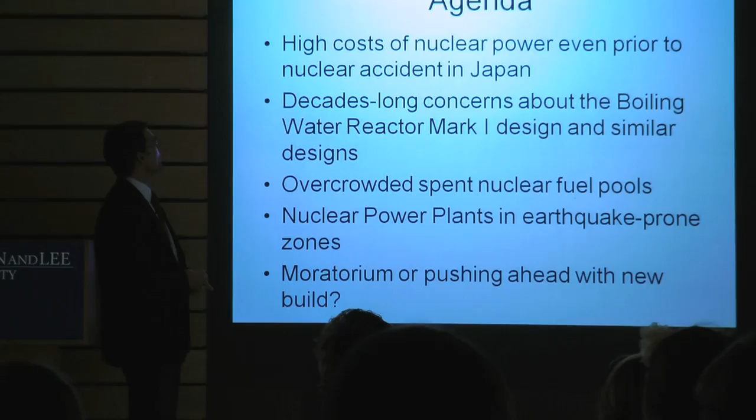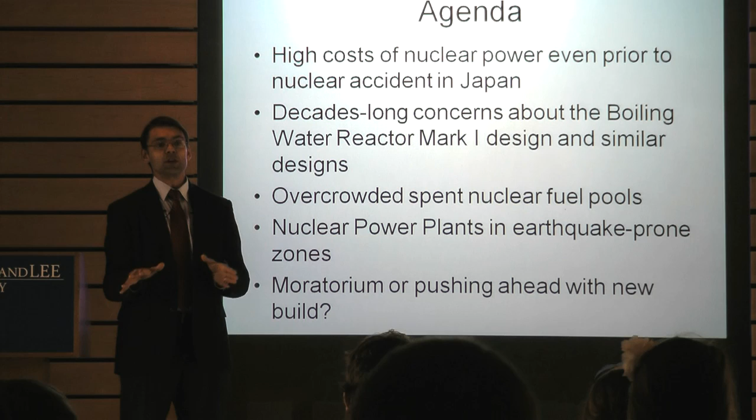So first I'm going to talk about nuclear power's high cost even prior to the Japanese event. A low price of natural gas and abundant natural gas is making nuclear power even more cost uncompetitive than it had been before, and that hasn't changed. In fact, it's looking a lot worse for nuclear in terms of its economic competitiveness potential.

Then I'll turn to the specific boiling water reactor design used at the Japanese nuclear power plant and look at some of the concerns about that design, kind of the good and bad of it. And then talk about this issue of the spent fuel pools that you've been reading so much in the paper and seeing on the news. Are they potentially dangerous? What should we be doing about overcrowded conditions in spent fuel pools?

And of course it's going to lead to the issue of nuclear waste policy. So are we ever going to get a permanent repository at Yucca Mountain or any other place? We don't know, and I don't know what the implications are in terms of this event, but we'll find out in the coming months. And then I'll conclude by looking at whether there's going to be any kind of moratorium on nuclear power plant construction within the United States.

We've seen announcements in a few other countries for moratoria while safety checks are being made. Some U.S. politicians are calling for a stop to nuclear power plant construction to do safety checks and look at emergency response before we move ahead with new construction.

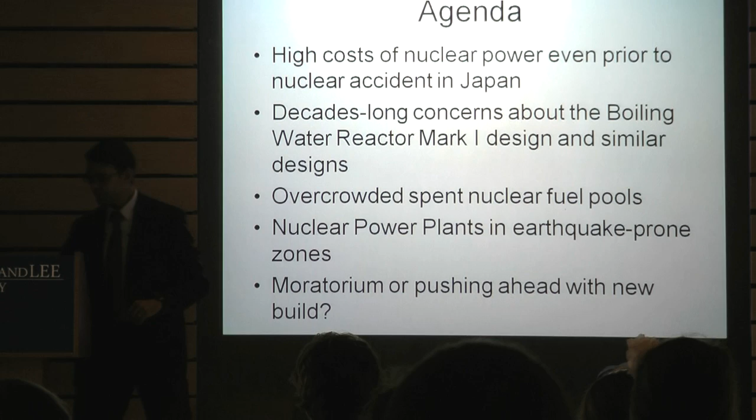Okay, so basically we need to know that a large nuclear power plant is an expensive project. It can cost several billion dollars for a large power reactor. A large power reactor is at least 1,000 megawatts of electrical power, typically now greater than that. And the AREVA EPR that Frank Settle and I visited almost exactly 2 years ago, we were in France together with a former Washington and Lee University student, Richard Cleary, spent a week in France touring various sites, and we saw the new EPR under construction at Flamanville.

And that plant is about a 1,600 megawatt electric plant. That's one of the largest power plants right now in the world. And there are a couple being constructed, and they're running into various delays and cost overruns. And so the price of nuclear power tends to be going up in some countries. Other countries, the cost has actually gone down somewhat.

South Korea has figured out how to keep the cost of nuclear power relatively cheap compared to other sources. They've been able to complete their latest reactor in just over 4 years, which I believe is a record for nuclear power plant construction, and pretty much keep it on budget. That has allowed the South Korean government to form a deal with the United Arab Emirates, UAE, to build 4 power reactors over the next 10 years. So this is one of the major projects underway now in the Middle East in terms of nuclear power. And so you need to pay attention as to what South Korea is doing and why they are successful.

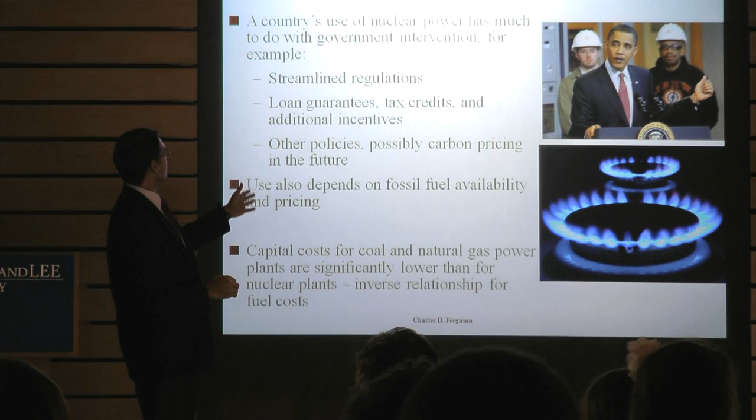The government is trying to offer various economic stimuli to get nuclear power going again in the United States. So we've seen streamlined regulations, and those actually go back to the early 1990s. I think it was 1992. I'm looking at Al Carr.

I think he's a resident expert on this in terms of the combined operating license procedure that was designed to so-called fast-track the regulatory process while still giving the public opportunities at certain times to intervene where appropriate. We're now testing out that system right now to see if it is truly streamlined, and there's a lot of back and forth between the Nuclear Regulatory Commission and the utilities and the reactor designers to make sure there's enough information and a complete package when the NRC does the review. And these are very complex licensing procedures.

The government is also offering various federal loan guarantees up to 80% of the capital cost of a plant. The government is putting forward several billion dollars' worth of federal loan guarantees, and some politicians would like the federal government to offer even more, maybe upwards of $100 billion worth of federal loan guarantees.

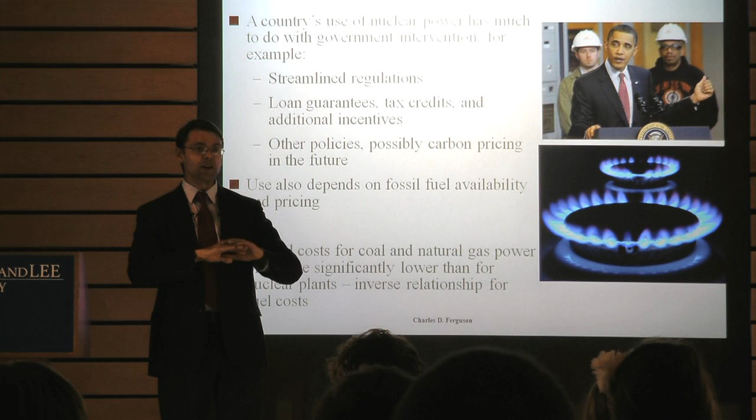So that's a bit of a controversial point, but I think even those who are somewhat skeptical of nuclear power, and even those who are very much in favor of the free market, will still say, okay, since we already have these federal loan guarantees in place in the 2005 Energy Policy Act, let's at least allow the first tranche of them to go forward and see if they actually do something in terms of a stimulus.

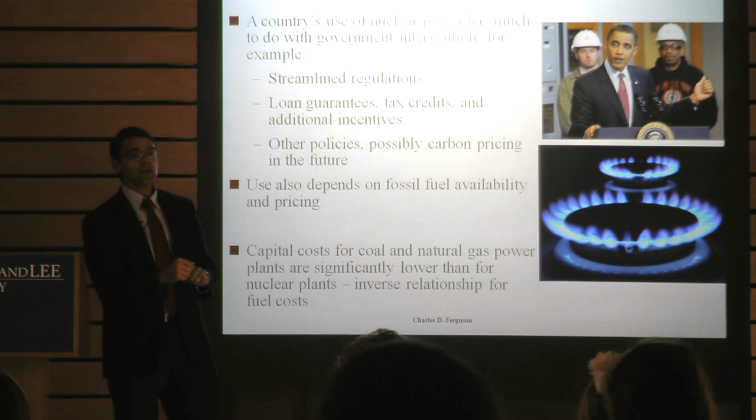The government has also offered tax credits for the production of electricity from low carbon sources or near zero carbon sources, such as nuclear power, wind, and solar, and geothermal. And so it's not just nuclear that's offered an incentive in that respect.

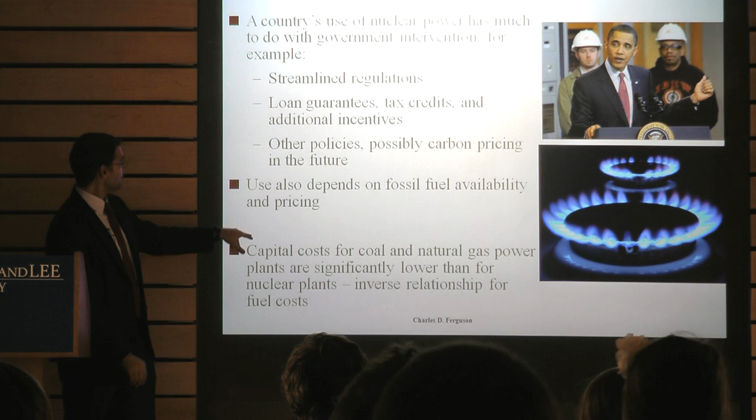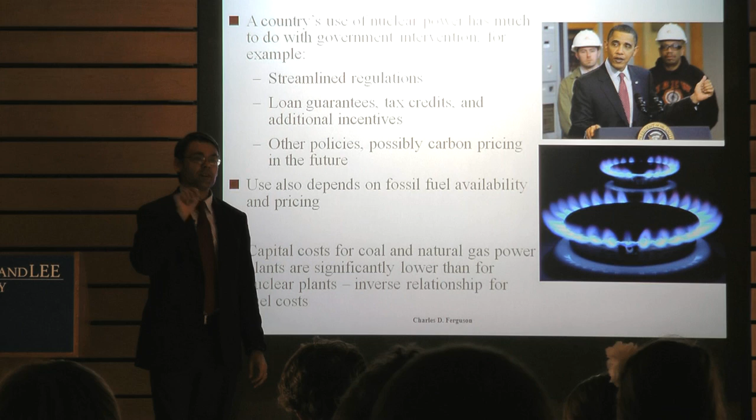And there's other things we can talk about in terms of liability insurance, et cetera, but in interest of time, let me jump ahead and just underscore that the fossil fuel availability and the pricing, especially of natural gas, is a huge factor in determining whether nuclear power is going to go forward or not.

So what was interesting was about 2 weeks ago at the American Enterprise Institute, John Rowe, who's the CEO of Exelon, which is the utility in the United States with the largest number of nuclear reactors. I think they have about 18 or 19 now. They're going to decommission in about 7 or 8 years the Oyster Creek plant in New Jersey, but they'll still have the largest number of reactors of any utility.

Mr. Rowe has been very supportive of nuclear power, as you can imagine, as his role as CEO of that company. He also considers himself a kind of a conservative free market environmentalist. What I mean by that is he favors putting a price on carbon emissions. So it would benefit his company for sure. So if you can say carbon dioxide has a certain price, so much per metric ton of carbon dioxide, whether it's $25 a ton or $50 or $100, certain prices will then send a market signal that will tend to favor certain types of low or no carbon energy sources, such as nuclear power.

Well, let's face political reality. With the new Congress we have now, we're not going to get any kind of carbon cap and trade legislation passed. And so Mr. Rowe said, we got to face that reality, and we also have to face the reality, as he said in his talk a couple weeks ago, natural gas is queen, and you would be a fool, he said, to bet against a lady.

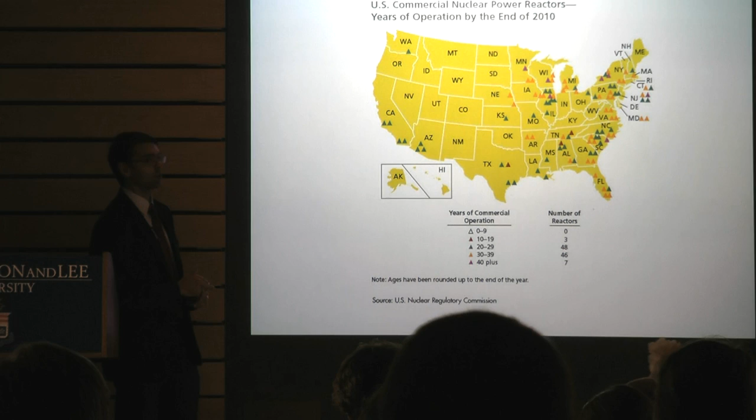So one thing to notice in this chart, it's hard to read these numbers, but I'll show you a slide just a moment from now where it's better to understand this point, that our nuclear power fleet is aging. As I said a few minutes ago, we haven't built a reactor in a very long time, and we haven't ordered new reactors in an even longer time still, in over 30 years. So the fleet is fairly old. Most of the reactors are at their nominal 40-year life point.

Now, the 40 years isn't some kind of magic number that the plant just breaks down at 40 years. That was just a decent guess, that the plants could operate up to 40 years, and then when we get to that point, we'd reassess and see if things are operating safely and that the plant's life could be extended another 20 years. Almost all the reactors that have applied for license extensions in the past 10 years have received those license extensions for another 20 years. So that extends the fleet for another 2 decades. But beyond that, we could be facing what I call a retirement cliff.

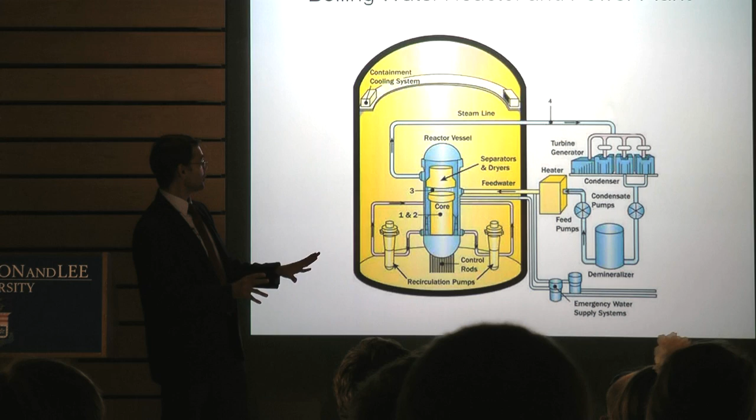So one reason maybe the boiling water reactor design isn't favored over the pressurized water reactor design, but there are other benefits to this type of design. It's a simpler design in that you have one basic loop in which water and steam circulate.

The reactor core during safe operations should be, must be, fully covered with liquid water. At the top of the reactor pressure vessel is where steam is formed, and that steam is directed through this pipe - the steam line - impinging on turbines, and then they go round, and then they're connected to an electrical generator. That's how you produce the electricity.

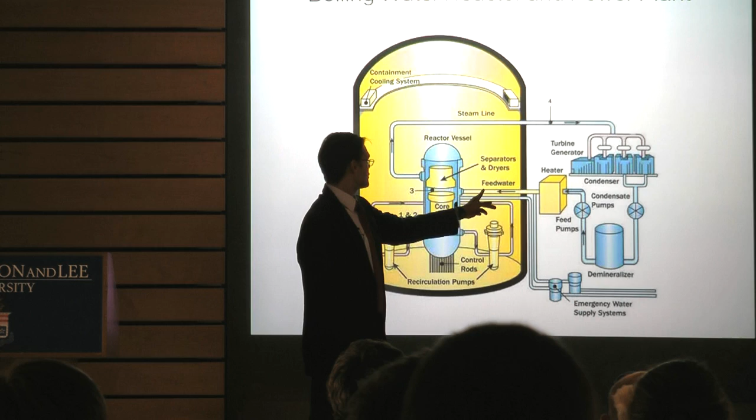Then the steam is condensed in a condenser and turned back into liquid water, and that's pumped back into the reactor core after it's heated up. You don't want cold water hitting the nuclear fuel, because that might cause fuel damage. You want to do some heating up before it goes back into the core. So it takes that reactor heat to create steam, and you start the process all over again.

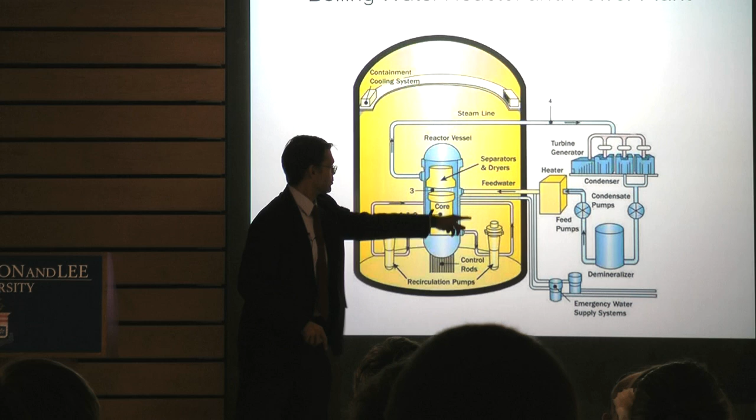And then you have these recirculation pumps here, and this loop right here to keep water also circulating. You got to keep the core cool, as you've all been following in the news.

I'm sure you've all learned that when you shut the reactor down, there's still energy being produced - that's radioactive decay heat. Immediately after shutdown, there's about 6% of the power that there was right before shutdown.

So reactor 1 at Fukushima was a 440 megawatt electric power plant. So when that shut down, you multiply that by 6%, and you still have that much power being produced. You have to get rid of that heat, or else the water will keep boiling away if you don't have that circulation.

The reactor fuel rods can become uncovered, and then it could become damaged. You don't have a meltdown right away - that's another term that's been thrown around pretty loosely in the press, saying, well, the reactor fuel rods become uncovered, and boom, things melt down, it's all over, you've got this slag heap of liquid fuel. It doesn't happen that rapidly. There are a lot of intervening stages.

The fuel first can blister and buckle and release some radioactive fission products, especially radioactive gases like radioactive xenon. If the temperatures keep getting higher and the fuel remains uncovered, you can start to actually have a transformation into a liquid state and have some partial melting. Then as it further heats up, you can actually have close to a full meltdown. But there are a lot of intervening steps along the way.

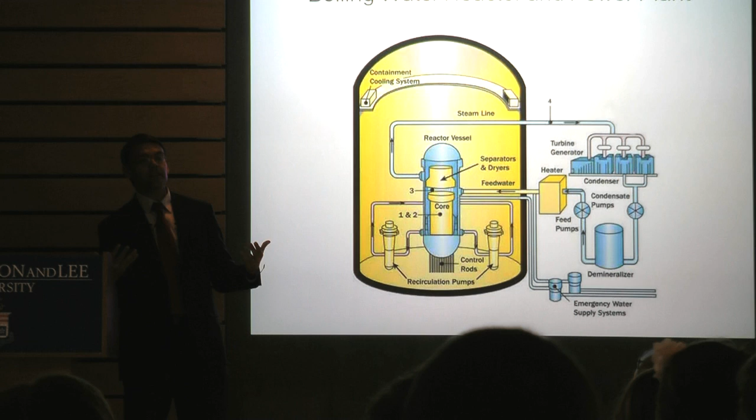As far as we know, from the information we have from Japan, we haven't seen anything nearly that drastic happen yet. It's believed that there has been fuel damage at least at reactors 1, 2, and 3 - those are the 3 reactors that were operating right as the earthquake struck.

This is actually from the latest email I got from TEPCO. I'm on TEPCO's email distribution list.

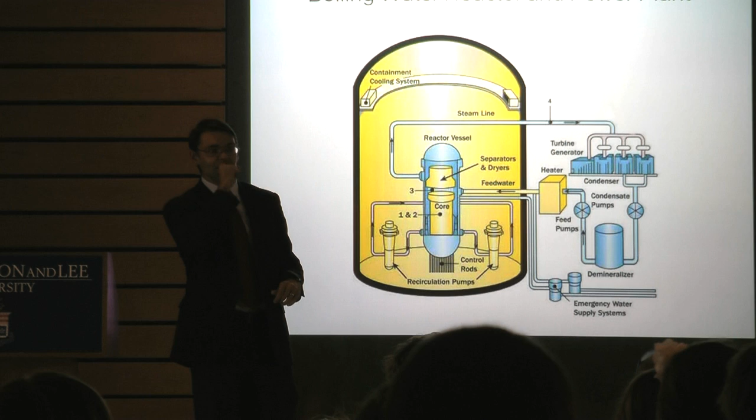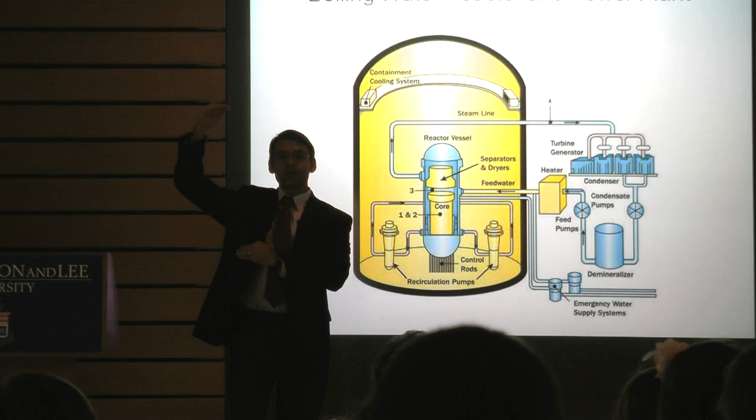They said that for reactors 1, 2, and 3, the top roughly 1.3 to 1.75 meters of those fuel rods are uncovered. So that's still not good. They're still trying to get the plant under control, I think, just based on that information.

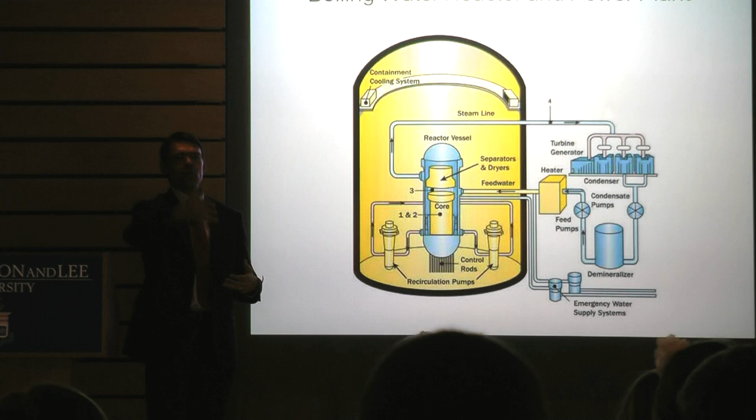Apparently over this past weekend, they've got electric power restored to the power plant from off-site. That's good news - they need to get these pumps going again, they need to get the primary coolant system going again, instead of doing these pretty desperate measures like shooting in seawater through water cannons and at one point trying to drop seawater in through helicopters.

Here's a diagram you may have seen a lot. It's the cutaway of a BWR Mark I containment structure. And there's kind of layers within layers.

The one concept that you should walk away with from this talk is defense in depth. What that means is that there are layers of safety systems, layers of protection to prevent radioactive fission products and other radioactive materials from going into the environment. The first layer of protection is the fuel cladding itself, typically made of a zirconium alloy called zircaloy. So as long as that's intact, radioactive fission products can't escape into the environment.

But if fuel deformation or fuel damage starts to happen, the zircaloy cladding can break down and start to oxidize. With the interaction of steam on the zircaloy, hydrogen gas can be produced. And if that hydrogen gas builds up to such a pressure and volume that it's ignited, you can have a hydrogen explosion. It's not a nuclear explosion by any means. It's a hydrogen explosion, but it's still serious, mind you.

So far, what we've seen is not major damage in the primary containment structure, except perhaps in reactor 2, where it looks like there may have been some damage in the steam suppression system. The hydrogen explosions we've seen have basically blown holes in the outer roofs, this outer containment material that's not that strong. The strong containment structure is the primary containment wrapped around the reactor pressure vessel, and that's the main containment you don't want to suffer a breach.

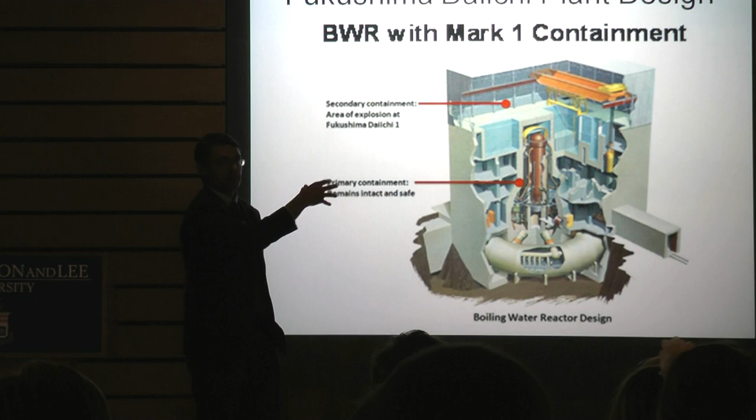The problem with this design is that there's not a lot of volume in that containment vessel. So as steam builds up, you have to vent and vent and vent to prevent an overpressurization that could lead to possible rupture of the containment structure. That's the situation they're in now.

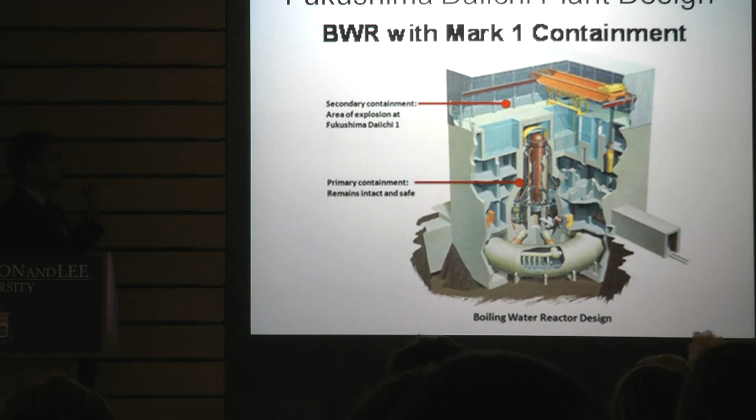They're doing a lot of venting to release that pressure, and during the process of venting, some radioactive materials are released.

There have been concerns about this design going back to 1972, the year after Fukushima reactor number 1 began operations. Currently we have 23 reactors in the US with this type of design or similar design, and of those, about 6 have what's called an ice condenser emergency cooling system.

Concerns were raised about that about 10 years ago in a book by Kenneth Bergeron called Tritium on Ice. Dr. Bergeron, a PhD physicist who worked at Sandia National Labs, was an expert on these types of containment systems, having done a lot of computer simulations and testing. He grew concerned that there wasn't enough attention to potential safety problems with these types of plants in certain accident scenarios. The title of his book refers to the production of tritium, a nuclear weapons material, in certain commercial reactors.

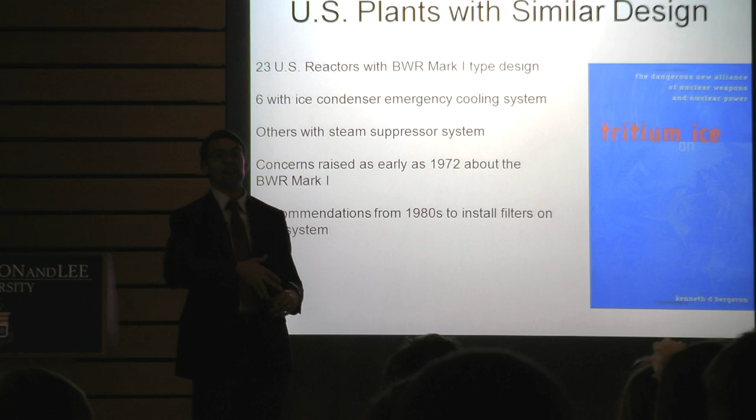The Watts Bar 1 reactor, which I mentioned earlier, the last reactor built in the United States, is actually producing tritium for nuclear weapons now. That was a decision made back in 1999 by Bill Richardson when he was Secretary of Energy. That's another side issue, we won't get sidetracked in that. We'll focus on the safety issue.

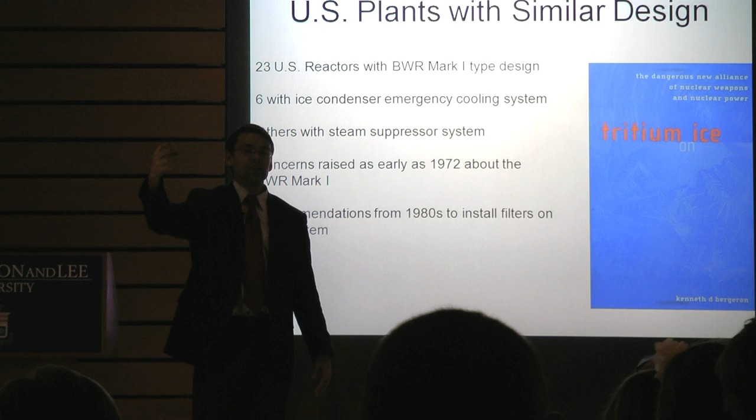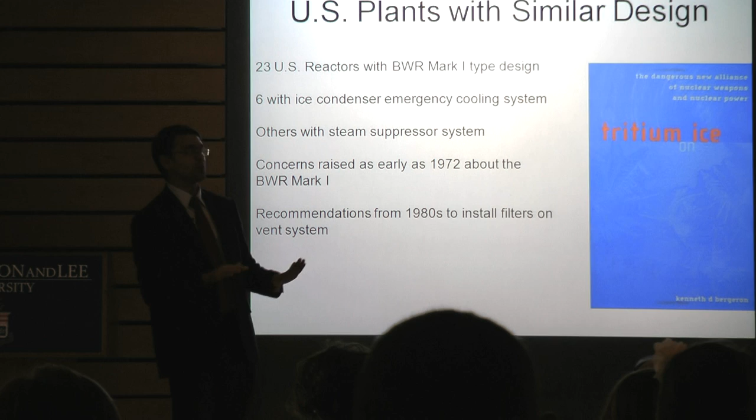Throughout the 1970s and into the 1980s, there were recommendations to improve the design of these BWR containment systems. One recommendation was to install filters on the vent system, so that as you vent during these accident scenarios, the filters would trap radioactive materials to minimize the amount going out into the environment. The industry pushed back on that, as my understanding goes, feeling it was too expensive to install those filter systems. I don't think it was done, though it may have been done in some plants in the U.S., but I'm not sure.

Now let's turn to the issue of seismic hazards and earthquakes. A lot of questions have been raised in the past week: are U.S. nuclear plants in jeopardy of a similar type of earthquake event as we've seen in Japan? Here's a map from the U.S. Geological Survey showing, as you might expect, no surprise here, the west coast of the United States along the so-called Ring of Fire in Asia Pacific. Yes, indeed, we see a lot of earthquakes and some major earthquakes in California and parts of the U.S. upper Northwest.

So there are two nuclear plants in California now, San Onofre and Diablo Canyon. At Diablo Canyon 3 years ago, in 2008, the shoreline fault was discovered there, and there was a new investigation.

The utility operator said they're still confident that the plant could withstand an earthquake of magnitude 6.8, with an additional safety margin above that. Still, some citizens groups are worried about that plant because of a new fault that had been discovered nearby.

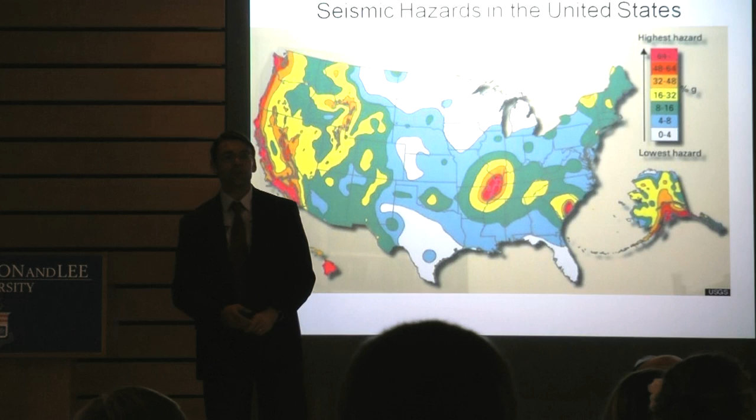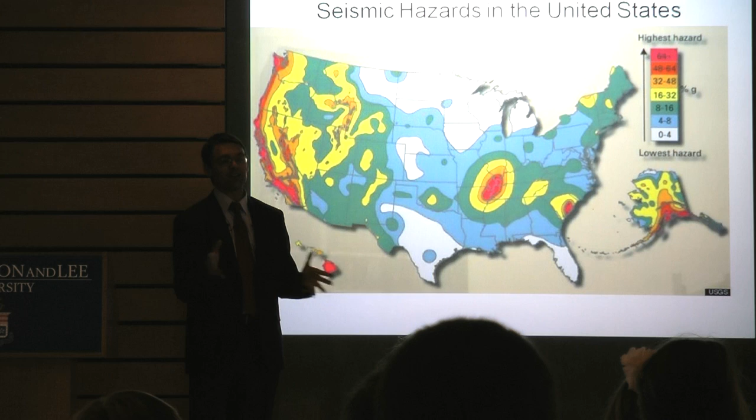There's another earthquake zone inside the continental U.S. If you're not a geologist or seismologist—or even someone like me, who during graduate studies did computer simulations on earthquakes—the simulations I did were more about the California type system, the strike-slip system.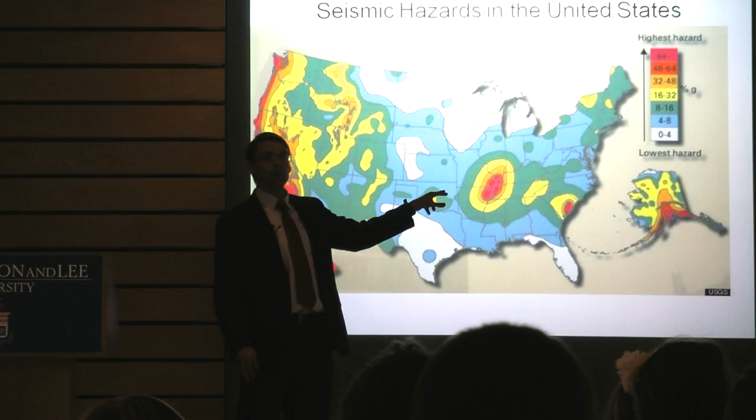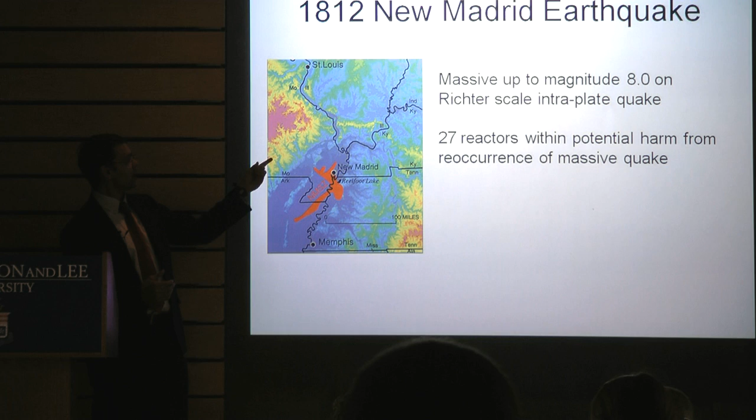Near Missouri, there have been intraplate earthquakes of fairly strong magnitude. In fact, almost exactly 200 years ago in 1812, there was a huge earthquake, now estimated up to magnitude 8 on the Richter scale, at New Madrid. If you look at U.S. reactors near that fault system, there are roughly 27, about a quarter of the reactor fleet, within that area. I'm not saying it's likely to experience such an event, but we know that about 200 years ago there was a massive earthquake near Missouri.

Okay, so spent fuel pools—what are we going to do about the spent fuel generated from nuclear power plants? Well, every year almost 2,000 tons of spent fuel come out of the 104 reactors in the U.S., and that has to immediately go into deep pools of water.

This is very hot material, as we've been seeing this past week. So it has to be cooled down, and typically it has to remain in a cooling pool for 5 years before you can take it out. After that, it's possible to transfer the spent fuel either to an interim facility using dry storage casks, or to a permanent repository or waste processing facility—but we don't have that.

So what's been happening is most of the spent fuel, almost 70,000 tons now, has been building up at all the power plant sites, and a lot of the pools are becoming overcrowded. To save space, companies have been re-racking, and to prevent criticality accidents, they insert rods made of boron to absorb neutrons.

But there's a possibility that these pools become drained, and the zirconium cladding around the fuel could catch fire. We've seen this maybe play out in Japan—at reactor unit 4 at Fukushima, the spent fuel pool there apparently suffered significant damage. There's a discrepancy about whether the pool is empty or has some water in it, but both sides seem to agree there's been significant drainage.

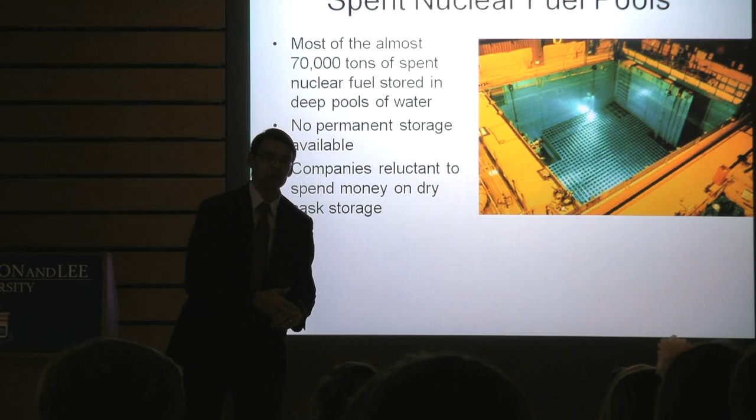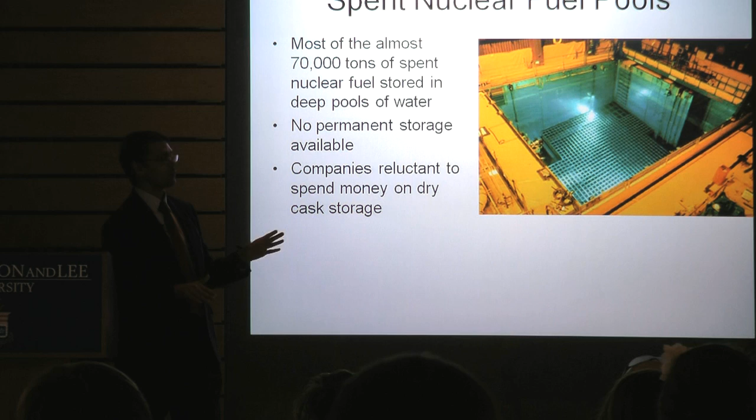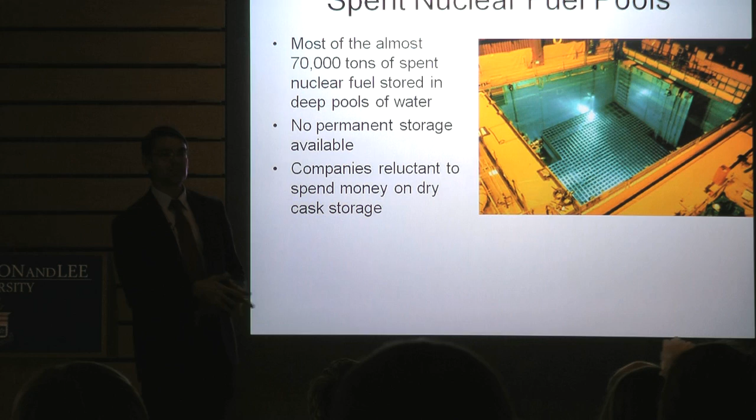The chairman of the Nuclear Regulatory Commission, Gregory Jaczko, told Congress last week he had evidence there wasn't any water in the pool, while the Japanese and some U.S. nuclear industry people said there appears to be some water in the pool. Nonetheless, it's a cause for concern—you don't want that material to catch fire and potentially lead to a dispersal of radioactivity.

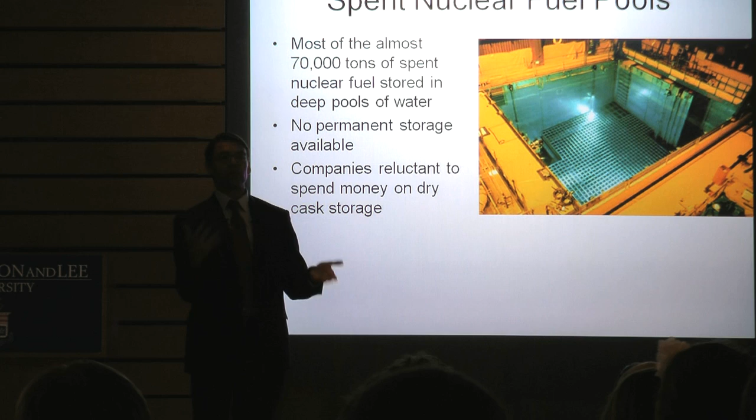So what's ironic is that about 10 years ago, right after September 11th, some independent experts—Robert Alvarez is one of them—called attention to the possibility of terrorists attacking these spent fuel pools and causing a dispersal of radiation. I don't know if anyone seriously thought back then that an earthquake and tsunami could actually lead to such an event taking place.

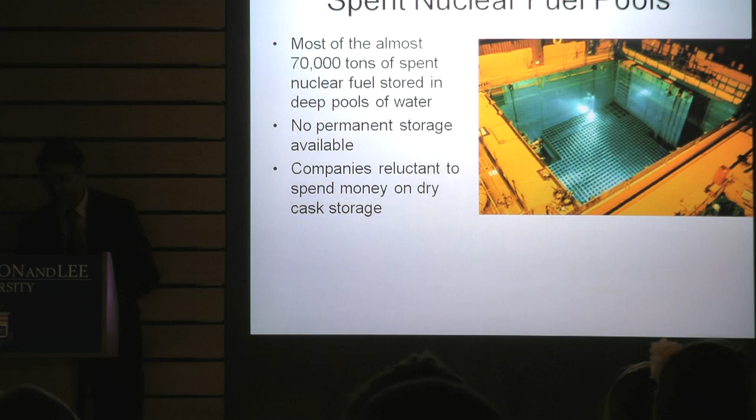So what can we do? We could transfer the overcrowded spent fuel at the 104 U.S. reactors to dry storage casks, which are very safe and secure—Bob Alvarez recommended this in his paper. You could fire rocket-propelled grenades at these things and they'd withstand that kind of attack. He estimated it would cost anywhere from $3 to $5 billion to do that transfer.

Now, the industry said, wait a minute, that's a lot of money—why should we spend it? Is there a real threat here? The other concern they raised was that you'd have to do two transfers, because ultimately we want to store that spent fuel in a permanent repository, so you'd need to ship it to Yucca Mountain or some other place we might open up.

So we want to minimize the exposure of the workers. So why do we need to do 2 transfers? One to a dry storage cask, and then another transfer later on to a cask that would be shipped to Yucca Mountain. So the industry has kind of said, no, we don't need to do this.

The National Academy of Sciences did a report about 5 or 6 years ago saying, it's possible that these pools could become drained and catch on fire, but it's not very likely. And they basically agreed with Alvarez's assessment in terms of the cost.

Well, is any other country actually doing this? Well, Germany is actually. The Germans, admittedly, most of them are pretty anti-nuclear, and they want to phase out their nuclear power plants. And they decided back in the 1990s to do this transfer of the spent nuclear fuel from these pools to the cask, and they were willing to spend the extra money.

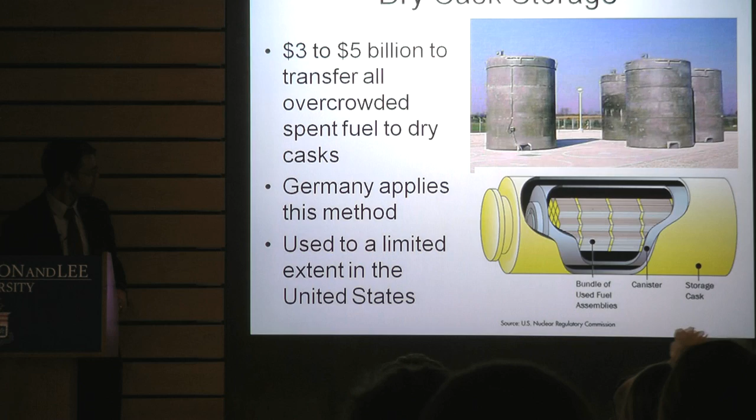Okay, so will we ever get Yucca Mountain, and does this event in Japan have any relevance to Yucca Mountain? I don't know. But we do know that President Obama and Secretary of Energy Chu and Senator Reid, they formed kind of a compromise. And this is very political: during the presidential campaign, Obama said, okay, I'm willing to support Senator Reid and say we're not going to move

into opening up Yucca Mountain, despite the fact that the previous administration, the Bush administration, had gotten a vote from Congress to open up Yucca Mountain. And so it left us with really no options for permanent disposal of the spent fuel.

So the compromise was that Senator Reid said to the President and Secretary of Energy, okay, let's form a blue ribbon commission. And so we have, on the Republican side, General Brent Scowcroft, and on the Democratic side, Representative Lee Hamilton heading this up. And they have a cast of technical experts as part of the commission, and they're trying to come up with a report by this summer to take a fresh look at the options.

And some would say, well, this was very conveniently timed because we had the Senate elections last November and Senator Reid was reelected. So perhaps there is a new opening for Yucca Mountain, and perhaps this Japanese event may create a new opening. I don't know. Let's stay tuned. Okay, so let me just kind of wrap up here.